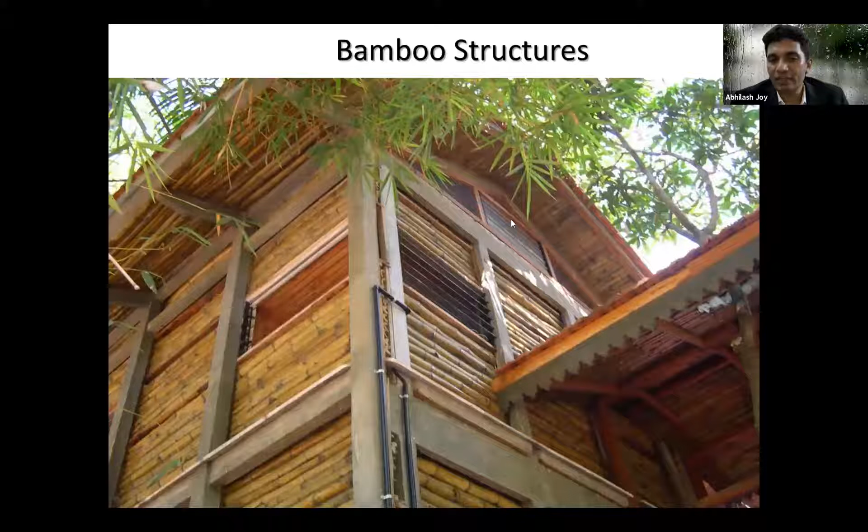It's not concrete. We use only sand and cement. It contains reinforcement, but the percentage of reinforcement is more. And we have the wall, the floor, and the roof panels in bamboo in combination with mortar. So it's a blend of three different systems: one is the RCC, one is the ferro cement, and the bamboo floors.

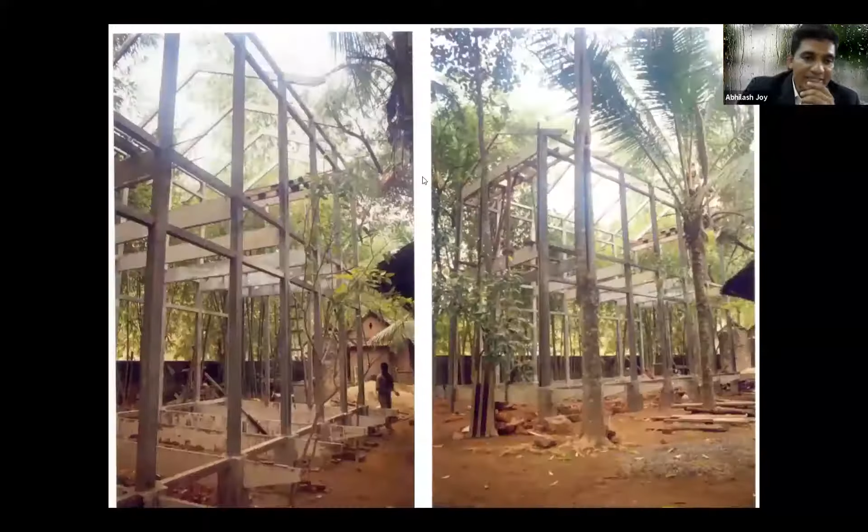So it's an office building which was built in 2002. It is occupied since 2003 and still working as an office building. It's a ground plus one building. So if you can see, the basic frame is like this. Since it's a waterlogged area, it was built on a pedestal. We had 60 centimeters height, which was never touching the ground.

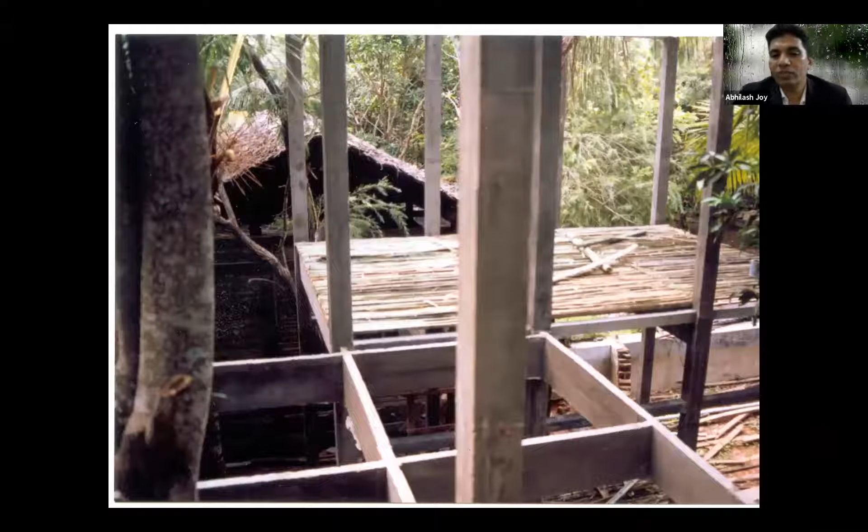And you see the ferro cement beams at the ground and the first floor level, and the roof beams, which again are ferro cement, and only the columns are in RCC, which was in situ, and all other members were precast. And the floor, roof, and the wall, if you see the systems here, every 1.2 meters we had frames to support the bamboo, so that the span of the bamboo was less.

We had done a lot of research on that during that time, because at that time the codes were not available, but we had done a lot of load tests. And the availability and the quality of bamboo was very important. It was very difficult to get good quality bamboo. And again, bamboo has a problem. All wood and natural fibers have a problem because they have sap, which contains glucose. So all the borers come to eat the glucose.

So any wood, either natural wood or bamboo, needs treatment. Our forefathers used to put the wood, or maybe the coconut leaf, inside water for a few weeks or months, so that all the sap oozes out of the wood or the leaf, and it can be used. Once the sap is gone, the borers will not attack much. Traditionally, that was the technology used, but for large quantities it's not viable to put wood or coconut leaves inside water. So we use pressurized artificial treatments.

We had copper, chrome, and arsenic, which is used for external treatment, and copper, chrome, borax. We have used the copper, chrome, arsenic method, which was available then, but now I think it is banned. So now we have only copper, chrome, and borax, which is used for pressure treatment for wood, so that the borers don't attack. If you come to see this structure, it is intact like this for the last 18 years. That's because of the treatment done.

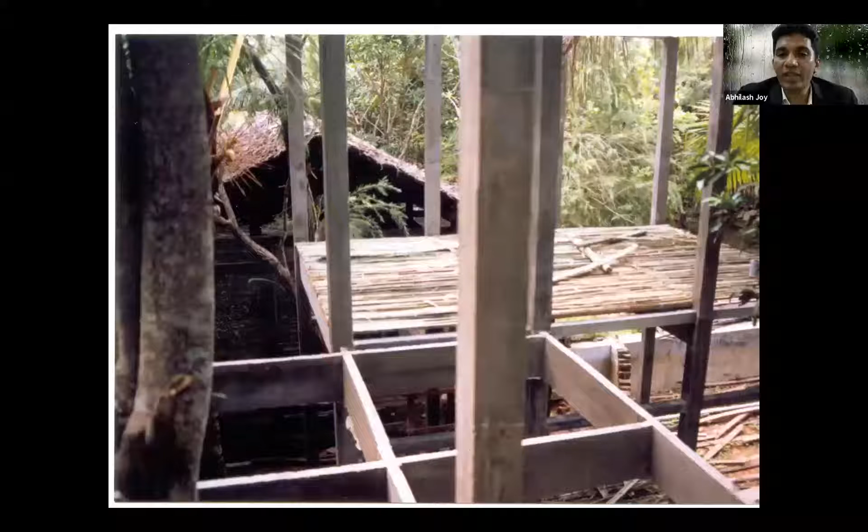So in any structure where we use wood, we have to treat it, and the moisture content has to be less. So we have to remove moisture. There are a lot of processes. Even for wood which is used for doors and windows, the water content needs to be less than 5%, so that it does not warp. So seasoning has to be done for any sort of wood structure, so that it does not expand and contract drastically.

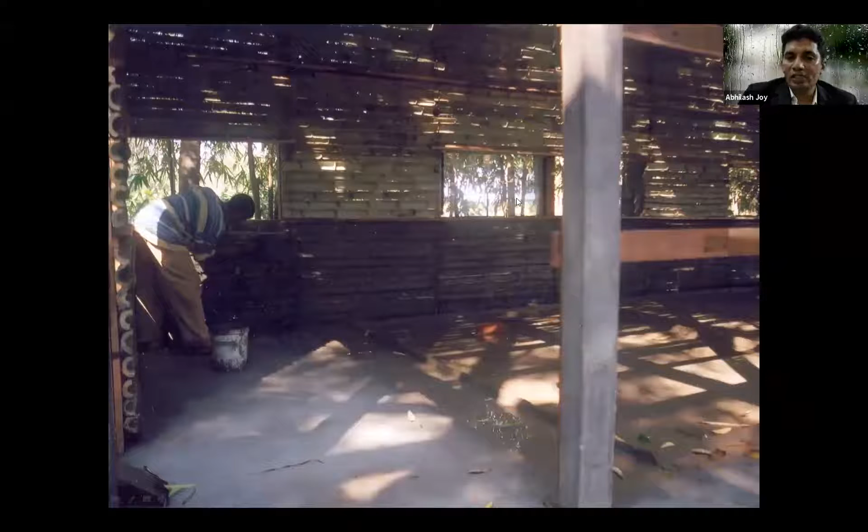And if you see the walls, again, there are so many minor details required for the connection between the columns and the walls. So panels like this. And if you see this office interior, this is the first floor of that building. You can see the bamboo on the roof. The wall from inside is just plastered, and the floor is almost the same. So it's an 18-year-old office which is still working. It's a talking testimonial.

And the main material which we have used there is ferrocement. In ferrocement, we don't use any large aggregates. We only use sand and reinforcement. And the reinforcement size, we usually don't go above 8 mm. Its design is like a shell. The main advantage of ferrocement is that it's decentralized. So if you have a remote location, we can use it and demonstrate its capability, and it has its own strength. But it doesn't meet the cover criterion because it's really thin.

It's maximum 1 inch to 1.5 inch thick. So there is an issue of cover criterion, but we use 1:1 or 1:2 mortar, so that the chlorides or sulfates from outside do not reach the reinforcement. So we have to be very careful, and the system needs to be done in a proper condition.

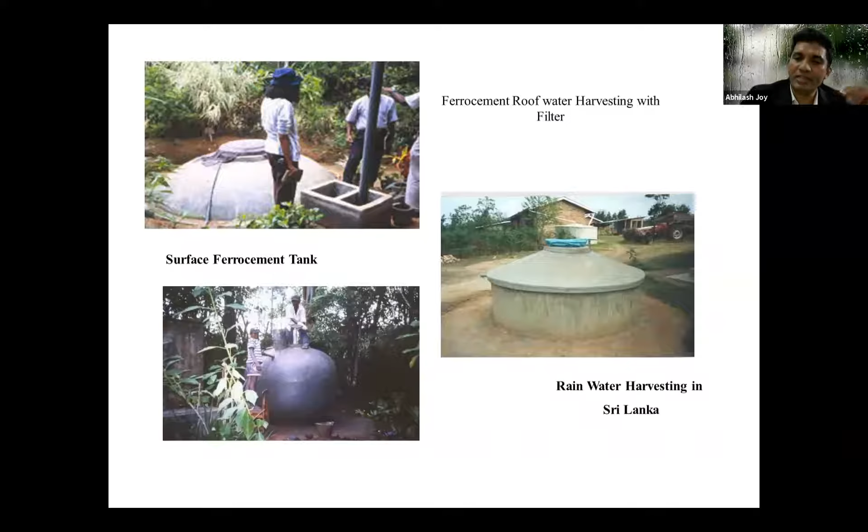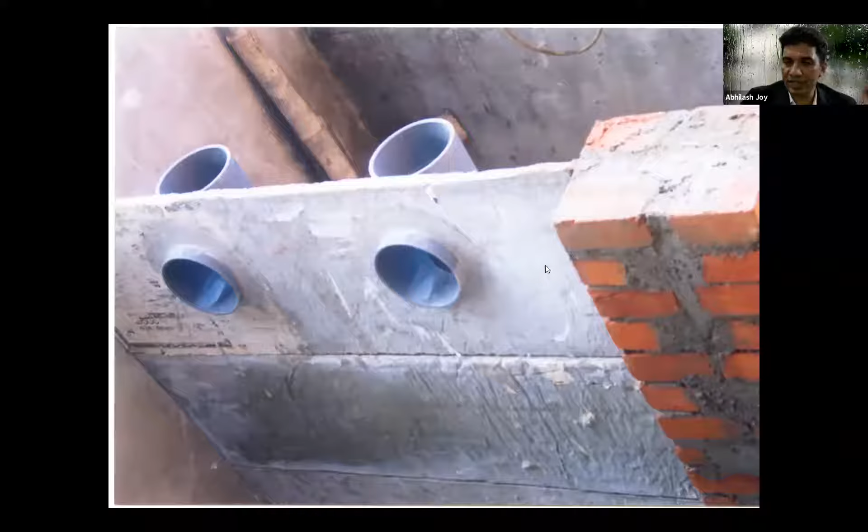And it can be used as water tanks for rainwater harvesting. It can be used for biogas plants. It can even be used as baffles inside the STP or septic tanks. So it has a wide range of applications, it's really light, and any trained mason can do it. So it's a decentralized technology. We can always try to use this. We have used it in a lot of different types of projects.

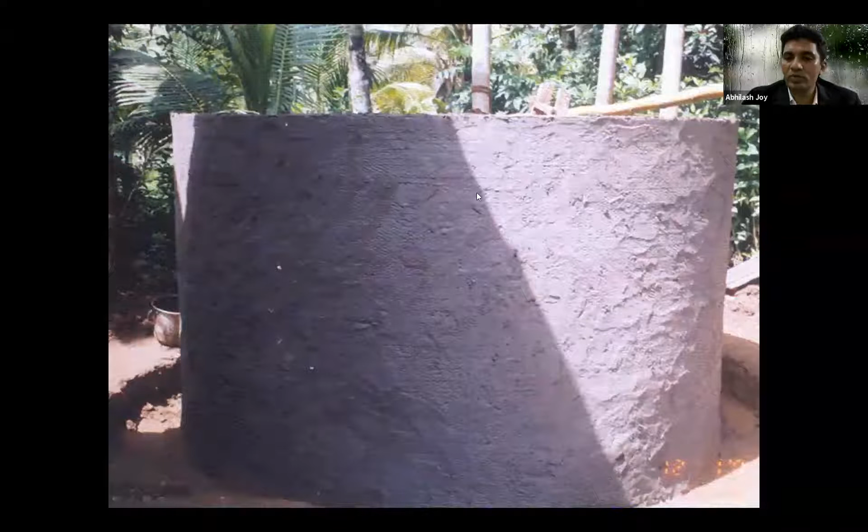Including, as you see, in buildings. And this is a surface tank which is made out of ferrocement. So we use weld mesh and chicken mesh for this, and a tank like this. The beauty of this tank is usually an RCC tank costs around 4 to 5 or 6 rupees per liter, but whereas this tank costs maybe less than 2 rupees.

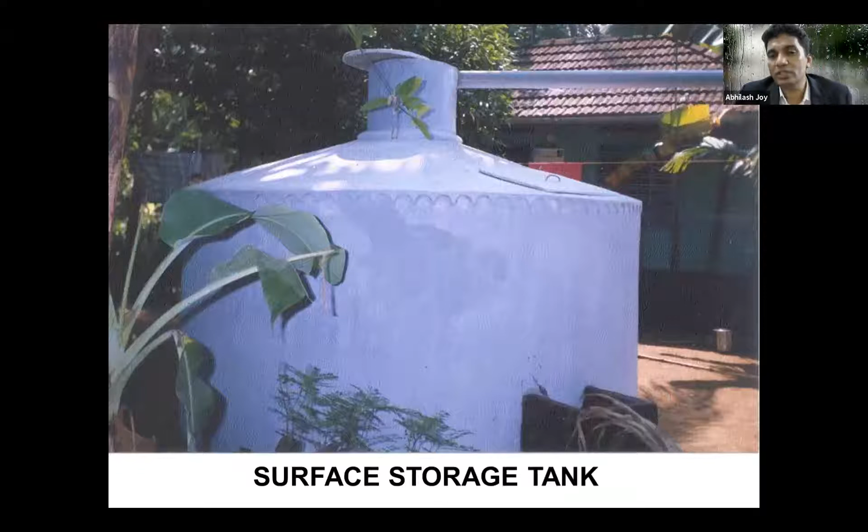If you use the soil strength, if the soil is really hard, we can use the strength of the soil, which maybe we have to dig like a well and line this thing, and the cost will come down further to less than 1 rupee. So the cost factor is really important. The life also is important, the cost also is important.

So this is a functional tank somewhere in Kuttanad region of Kerala. So there you have a flood prone area. So it's built on the ground, so that there is no water pressure and it does not come up. And this is the tank, ferrocement again, which, as I said earlier, is done below ground.

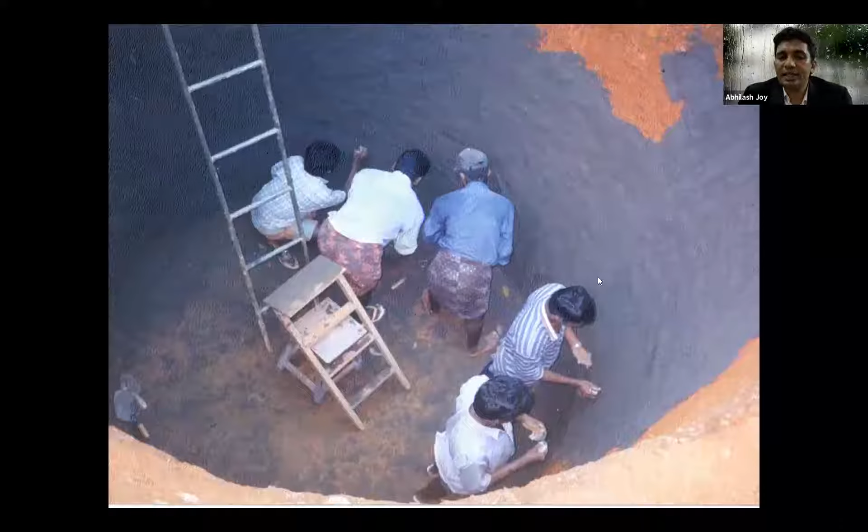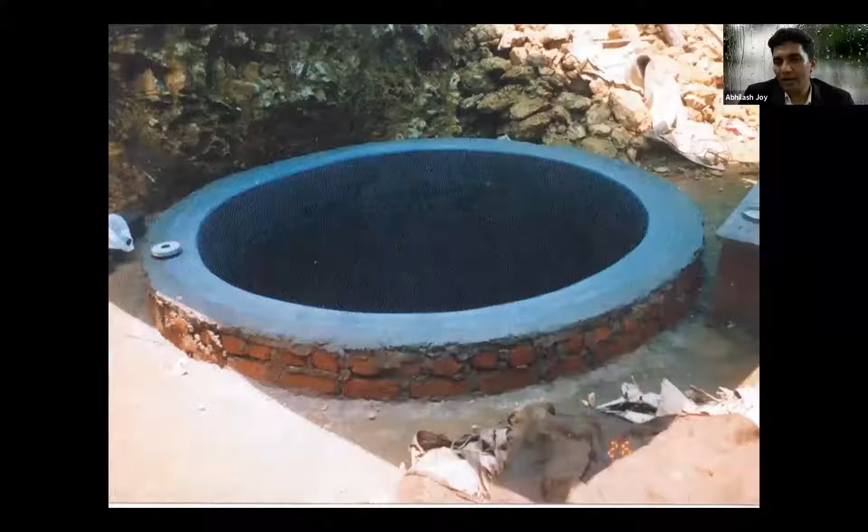So we make a hole like a well as per the volume required, and we plaster it first. Put chicken mesh, 2 layers, and then plaster it again and make a non-pervious layer. And that's it. We can use it as a tank. So we use the strength of the soil, and we can have a roof cover so that we can store water.

So as you all know, in Kerala we have around 3 meters of rain, that is 3,000 millimeters of rain every year. But still, in maybe January, February drought season, everywhere there is a crucial water crisis. So for every 5-member family, we should store the water required for our cooking and drinking needs. That's 5 liters per day maybe per person. So that's 25 liters per day, and for 4 months it's less than 10,000 liters.

So if you can build a tank like this, a 10,000 liter tank will cost maybe around 10 or 12,000 rupees, less than around 1 rupee per liter. So with a 12,000 investment, we can mitigate the water crisis.

If you have 1,000 square feet, that's 100 meters square of area, with 3 meters of rain we get around 3 lakh liters of water every year from 100 meters square. That is 1,000 square feet area of roof. So that is a large quantity, and what we require is only 10,000 for drinking and cooking needs, not all other needs. So I think we have abundant rain and water, and we should use this technology to store our own water. And you all should be ambassadors for doing that.

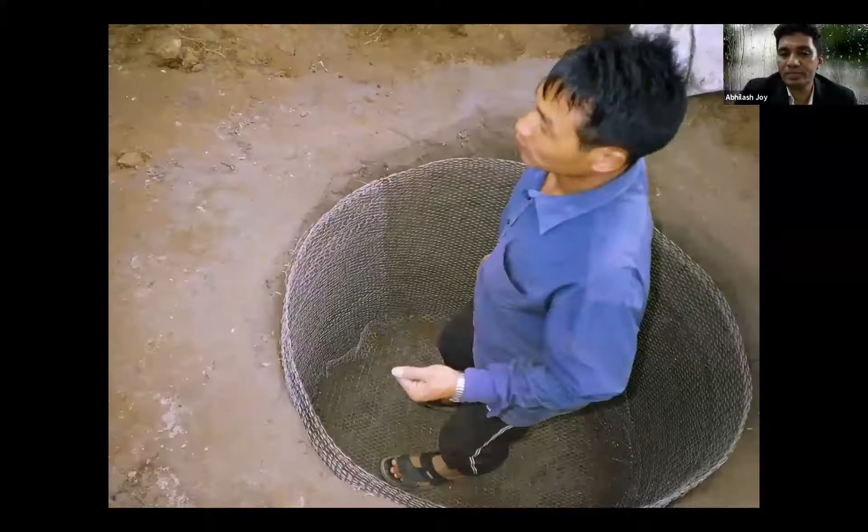So this is the beauty of ferrocement: it can be done really decentralized. These are all unskilled people who are doing this. They can easily do this. And even for frames, since the ferrocement works as a shell, you can use even bamboo sticks for creating the frame.

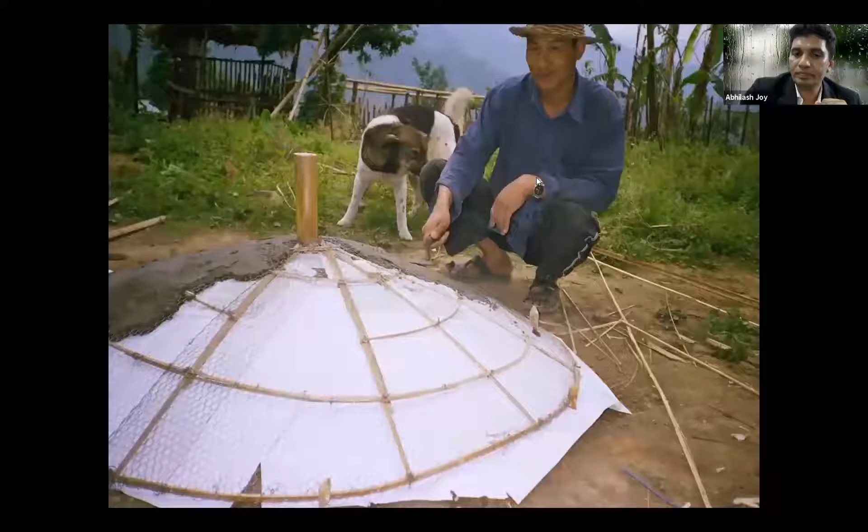For a small tank, because in Mizoram, Nagaland, all the northeast state people live on top of hills, because traditionally they had these tribes attacking each other. So they live on top of the hill, and the water source may be kilometers down, because what you see over there is not hills like here. It's sheer slope hills, and maybe it will be more than a kilometer to walk down to the nearest water source. So that was really important.

They attended a lot of trainings there and helped people store their water, because they have a lot of rain similar to us. Around the year they have rain. So that was really important.

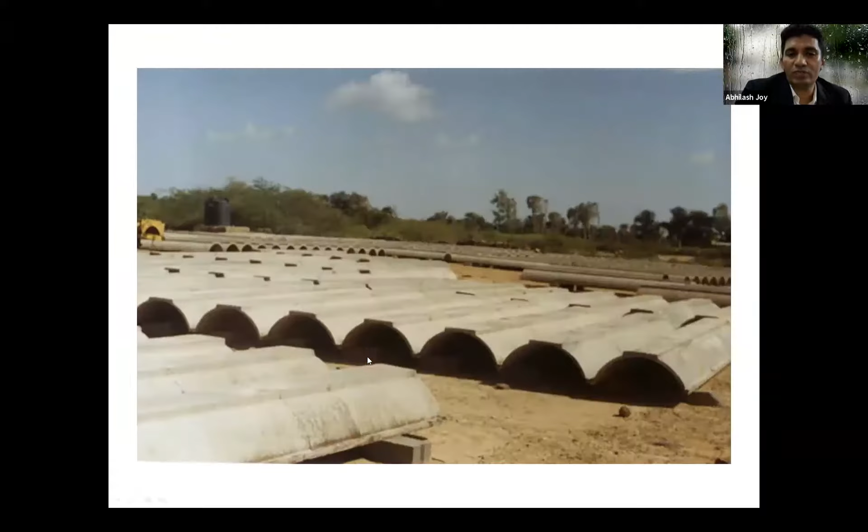So what happens here is that it was built on a buoy. It's floating, and the floating platform was sunk, and so that was the construction mechanism. So it's been there for the last 8 to 9 years. It's a working cottage. It's a resort in Kumbalangi, so it's still there.

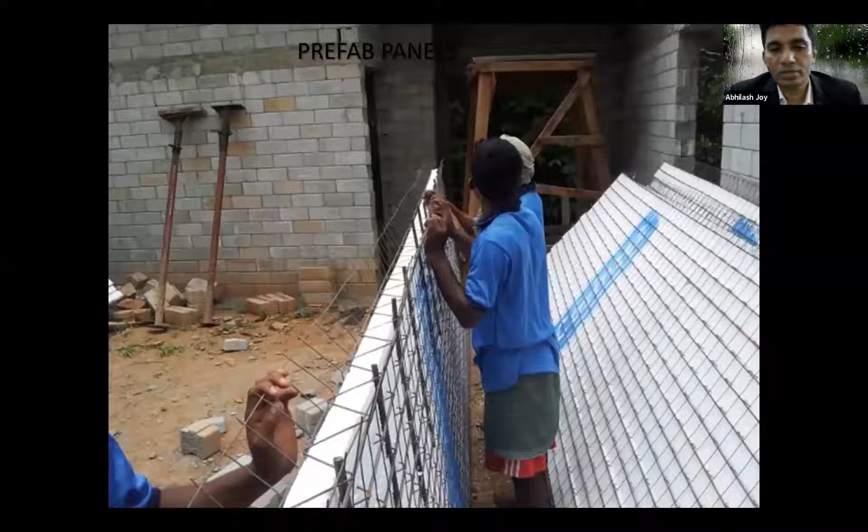This is another sort of panel which we use. This is a polystyrene panel. We call it thermocol. There is a company called Worldos, which is a Brazilian company. They make this panel. It's a factory-made panel. If you can see near their hand, you can see small truss-like structures inside this panel, which is factory-made. Inside the polystyrene, there is a truss at every 6 centimeters.

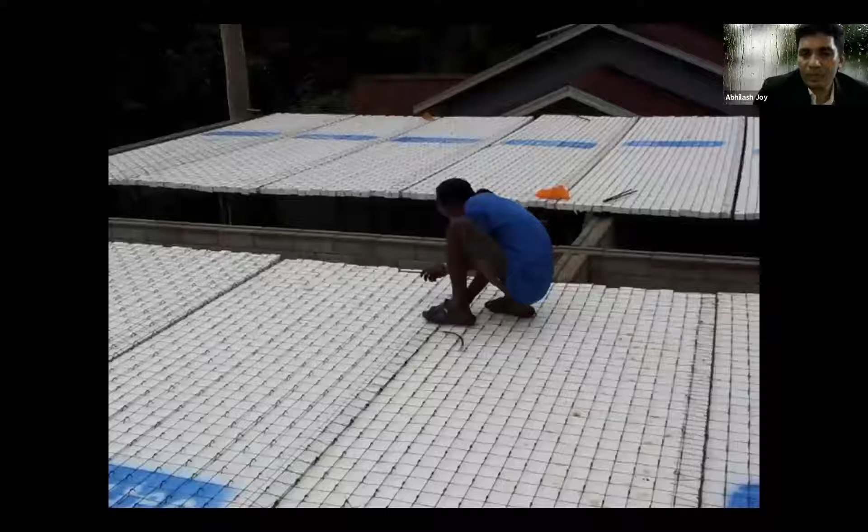So instead of using a single bar, they have used a small truss, and the capacity of the truss is very high; they have used up to 6 mm bars, 4 and 6 mm bars. So it acts like a truss inside. You can see this laying. It's usually used as a floor. They also use it as a wall structure. It can be easily carried by a person.

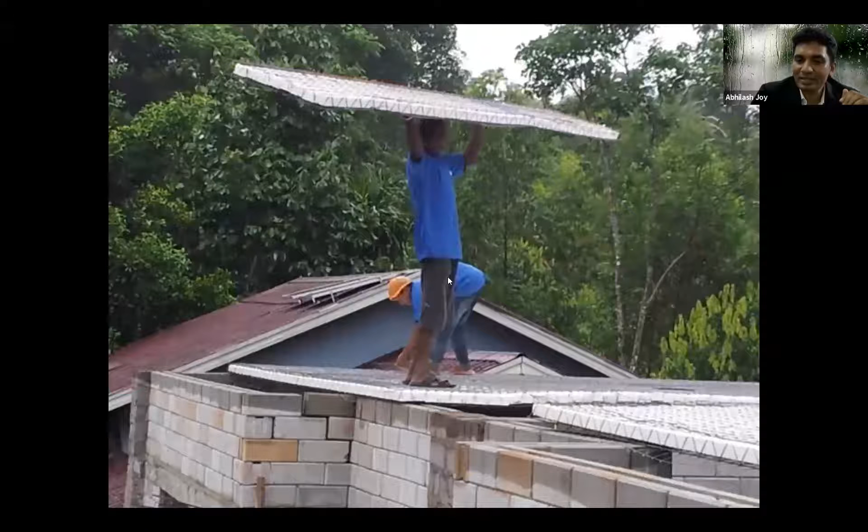So it's very light. You can see that it's almost self-supporting, but I'll show you how it can be placed, because you don't need a large shuttering mechanism. So for a 1,000 square feet house, the person has to come with this material in the morning. They can shutter in the morning itself, lay a 5 centimeter screed on top. You can see the minimal number of, and there's a connection detail between the panels to lap it. And you place just a 5 centimeter screed on top of it.

So we have done rooms up to 5 meters of span, and it's much more rigid than a usual 5 meter span. This thickness comes only up to 12 centimeters, including the panel and the screed. So usually for a 5 meter span, we need at least 17 to 18 centimeter thickness of slab. And still there might be vibration. For this type of structure for 5 meters span, I have noticed it's just like a hard floor.

So this is an alternative technology we can use. And by using this, you can do the construction in no time. It's very fast. Since the truss material is the supporting system, you don't need any great curing, so you can move on with the construction. So there's a time advantage by using this.

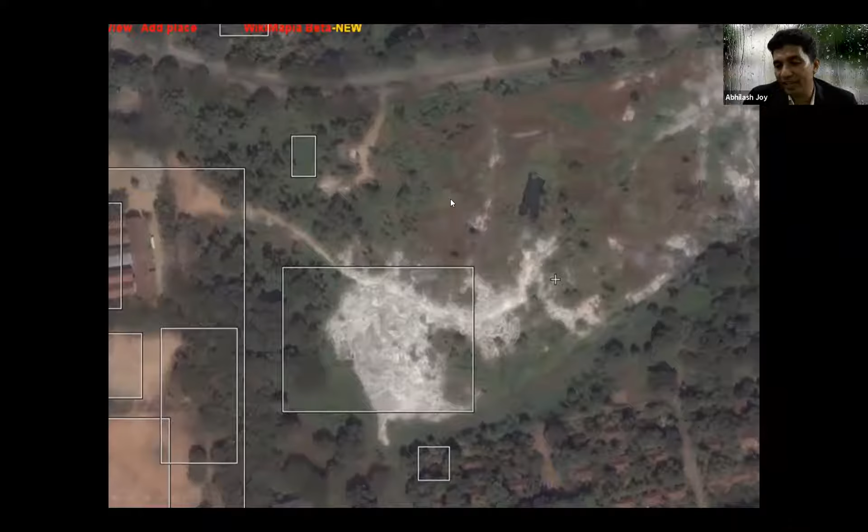This is an aerial photograph which is taken near Cochin. This is Udyogamandal, the FACT gypsum dump. Actually, it's a big mountain near Ambalamugal. So what happens here is that there is a product from rock phosphate, which is produced by FACT. So this is a byproduct. The main mineral comes from Africa and other parts of the world, and the byproduct is gypsum.

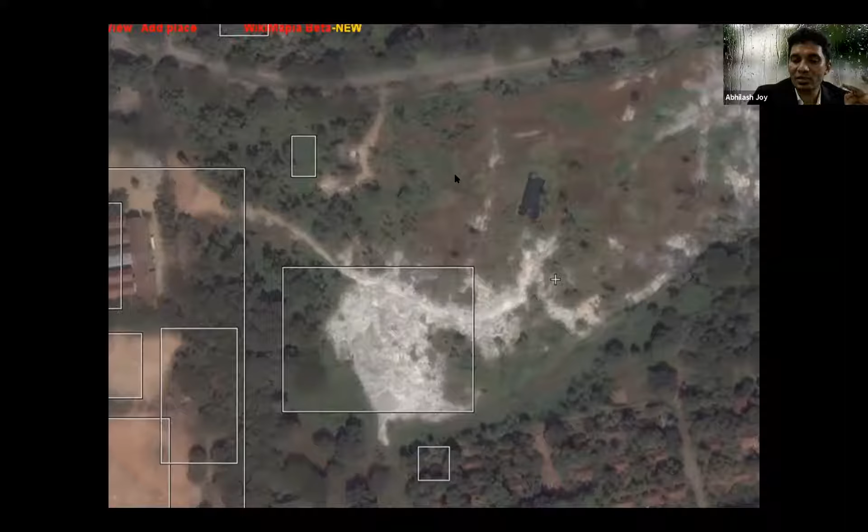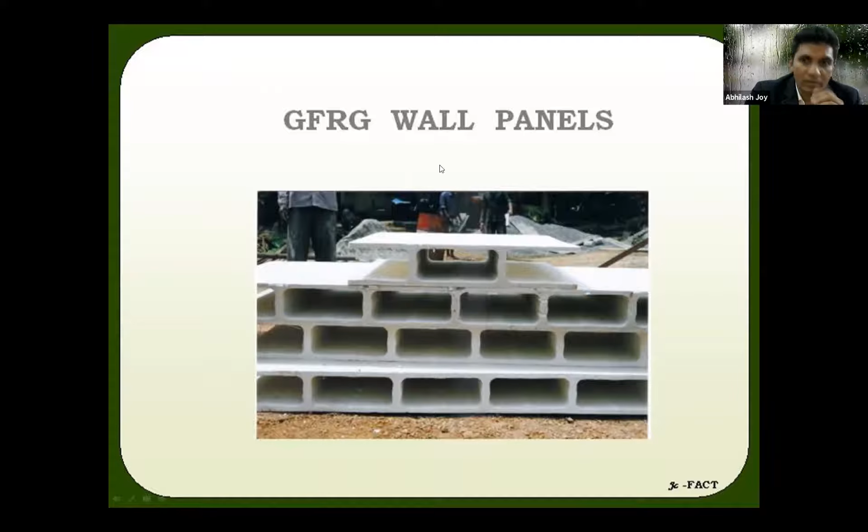And it was lying there for the last 30, 40 years, and now they are collaborating with an agency in Australia, and they are making these GFRG, glass fiber reinforced gypsum wall panels. These are very good and very fast for construction of houses. So we have these panels like this.

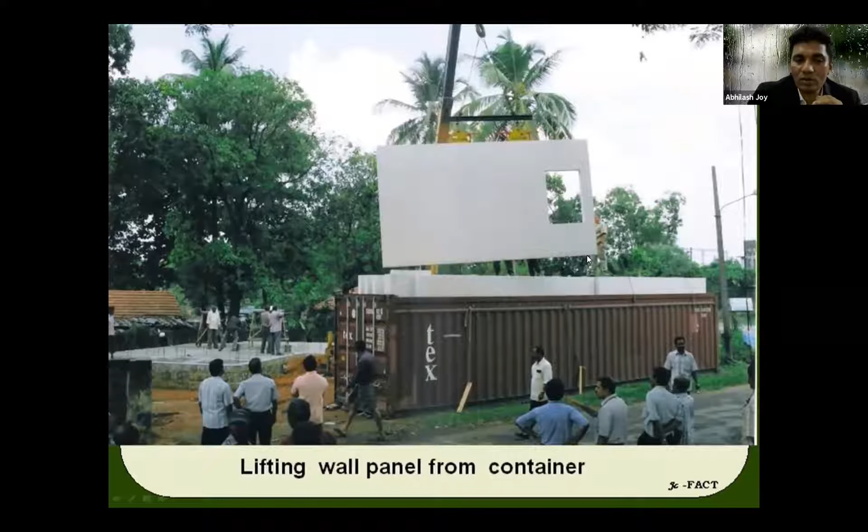I was involved in the construction of that house. There is a sample which is near Eloor. I think it is almost 15 years old, so it's still there. They use it as some sort of office. So the construction is, you have a foundation just like a normal house. You have reinforcement propping up, and you keep the panels as walls.

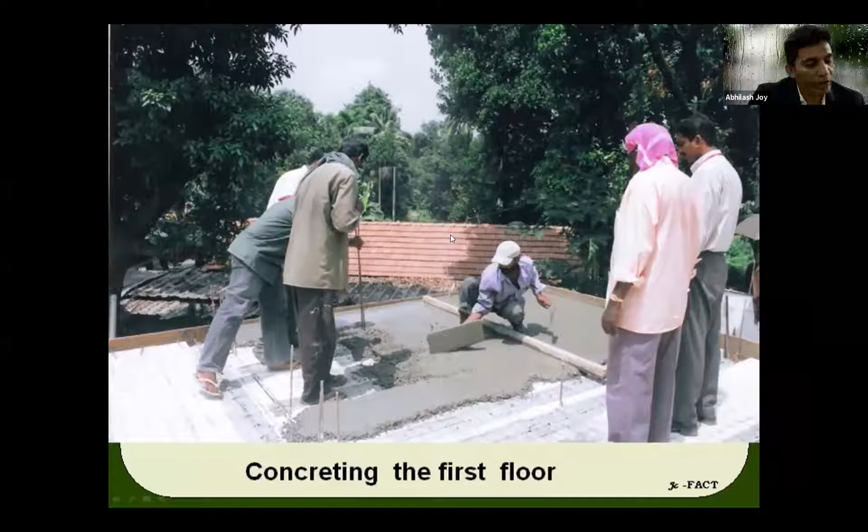The doors and the windows have to be pre-planned. And in a single day, you can place all the walls. Then comes the roof. So in a week's time, you can complete the walls and the roof of the structure. The disadvantage is that at the joints of the panels, you need to have some waterproofing done. So again, on the first floor, the panels are placed. So almost in a week's time, the structure is finished.

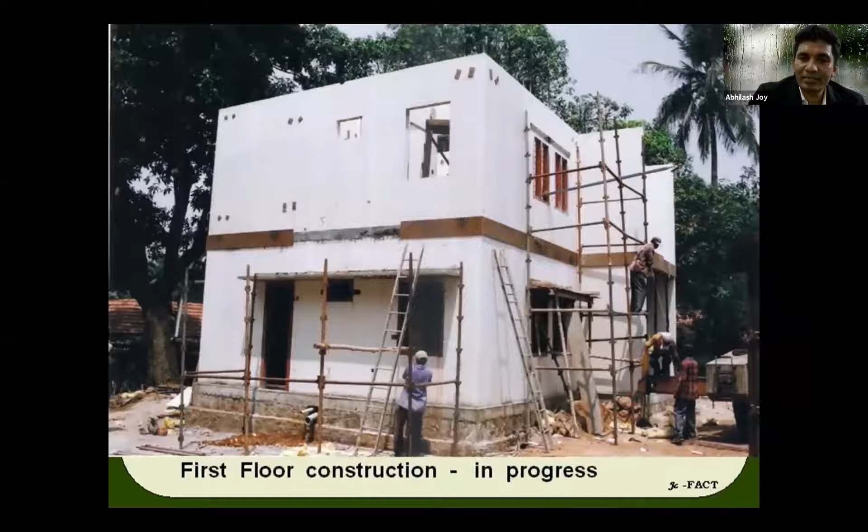And since we have a large amount of rain, they have covered it with a Kerala style roof, so that the panels are not exposed to direct rainfall.

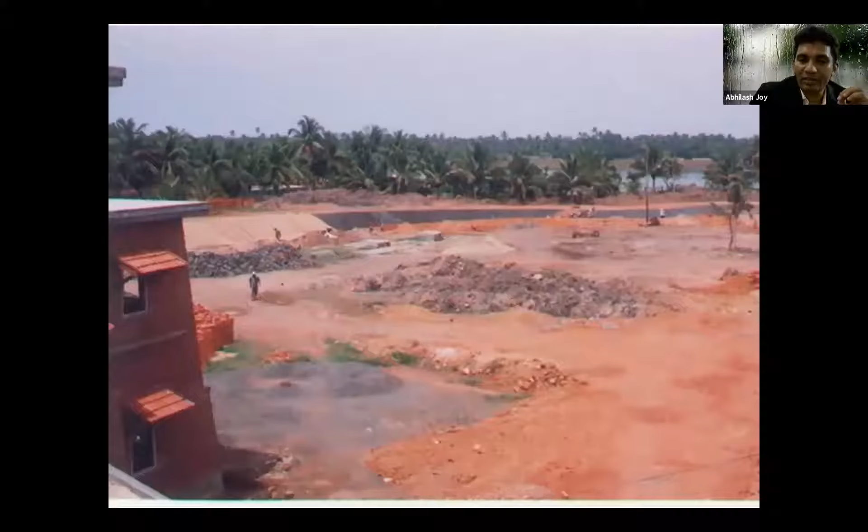Next, I would like to show a demonstration of rainwater harvesting, which is done using clay as a construction material. So as I've told you earlier, we have around 3 meters of rain, and most of the rainwater flows to the sea. And we don't use the water as such.

So this is a hotel in Ernakulam, Sarovaram Hotel. I think they have a very large tank. They store around 22 lakh liters of water there, and they use the roof as well as the ground.

So the surface groundwater also comes to this pond. If you see this, they have used the clay available there as the lining instead of any concrete. As you all know, clay allows water, but the permeability is very low. So clay is used as the lining material.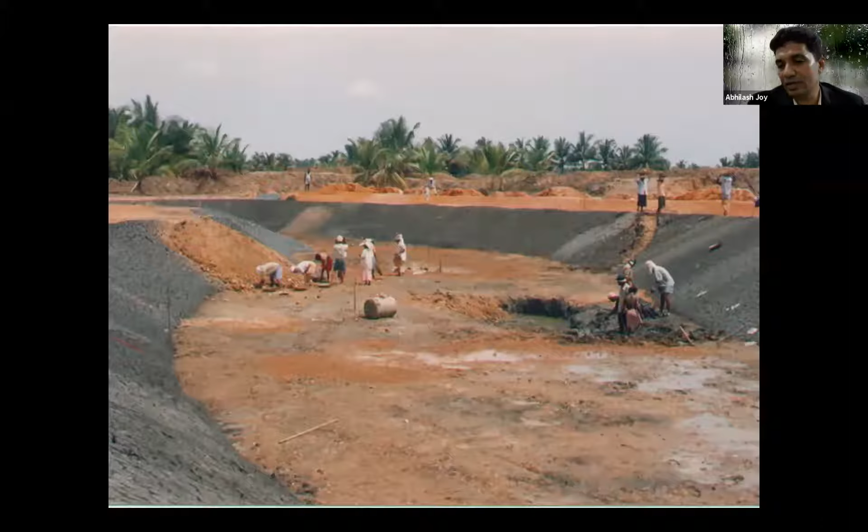If you have seen in paddy fields, once clay is dry, it cracks. So to keep it from drying, we have used jute geotextiles on top of it, so the clay does not lose water content and it remains intact. On top of it, we have used lining with granite stones. Since the area of land is very large, this pond gets filled up even before June 15.

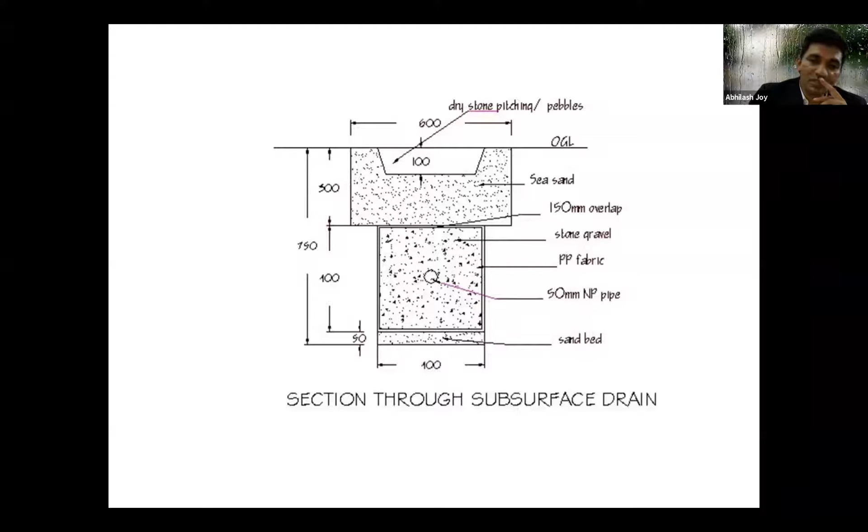And I was talking about the subsurface drains. We have used a subsurface drain, so all water falling on the ground comes through it. This white fabric is polypropylene fabric. This was built around the year 2000.

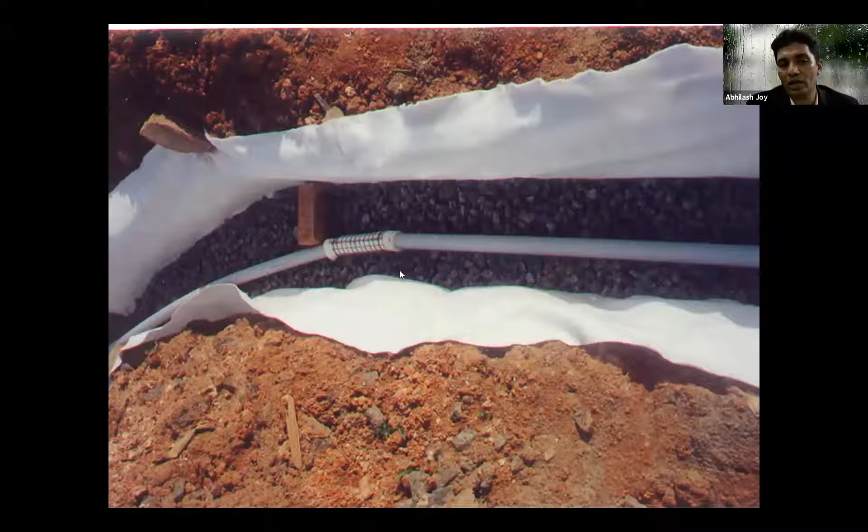We have this perforated pipe, and the beauty of this subsurface drain is it doesn't allow any particles to come in, so it comes in as filtered water. Even light turbidity will be cleared. By the first or second week of June, this pond gets filled up, and the entire drinking water requirement is met from this pond.

And the interesting thing is that as this property is right on the coast, and they have clay soil, they had no access to groundwater or the municipal water supply. They used to get only 22,000 liters per day, which was not at all sufficient for their daily needs.

The initial cost of construction was less than 10 paise per liter, because it used the clay from the site itself, and they got back the cost in 2 to 3 years. Otherwise they would have had to buy water from tanker lorries.

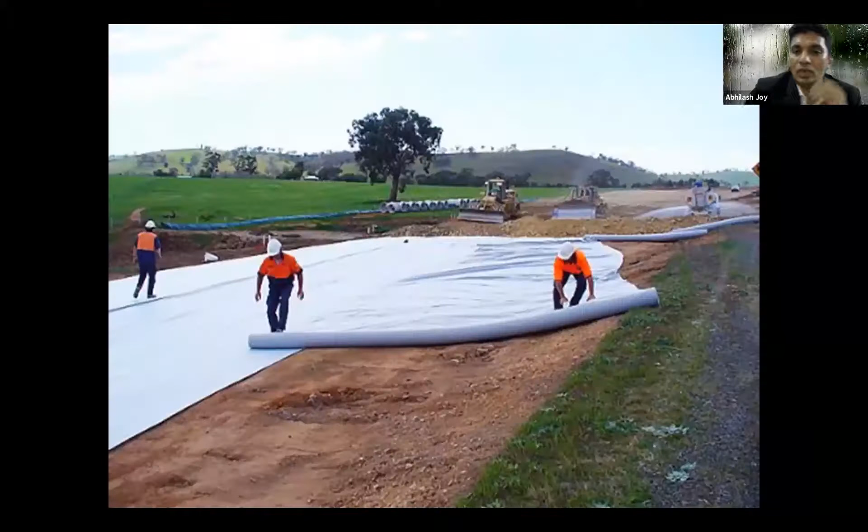Again, this fabric is used as a drain for grounds and roads. What happens to all our roads during the rainy season? They get bad. Good roads with proper subbase and base allow water to come up but not the clay. In usual roads, if the subbase and base are not good, under heavy traffic clay from the bottom comes up, lubricates the bitumen and aggregates, and potholes are created.

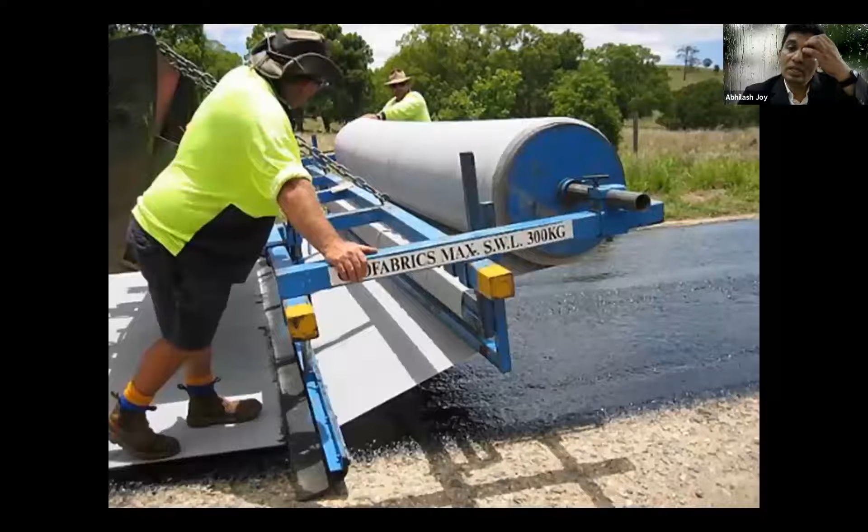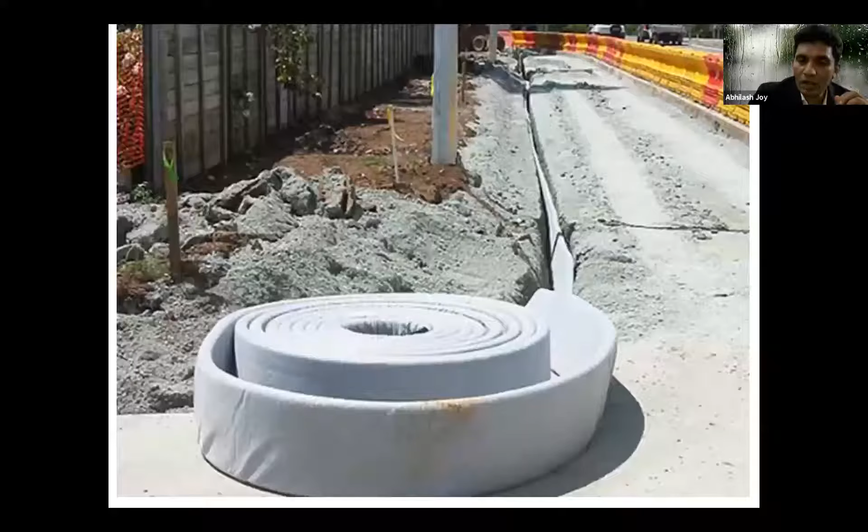If you have a membrane like this, it takes water directly from below the road and keeps the road intact. This fabric is used in developed countries under bitumen surfacing as a reinforcement layer. And it acts as a drain by the side of the road, so water from outside is not allowed into the road, protecting it. And railway lines, you can see.

This is the same material used as a band drain. In clay regions, it is very difficult to construct because there will be settlement. So band drains are used for reinforcing the soil. They take away water from the clay below, and the surface is preloaded.

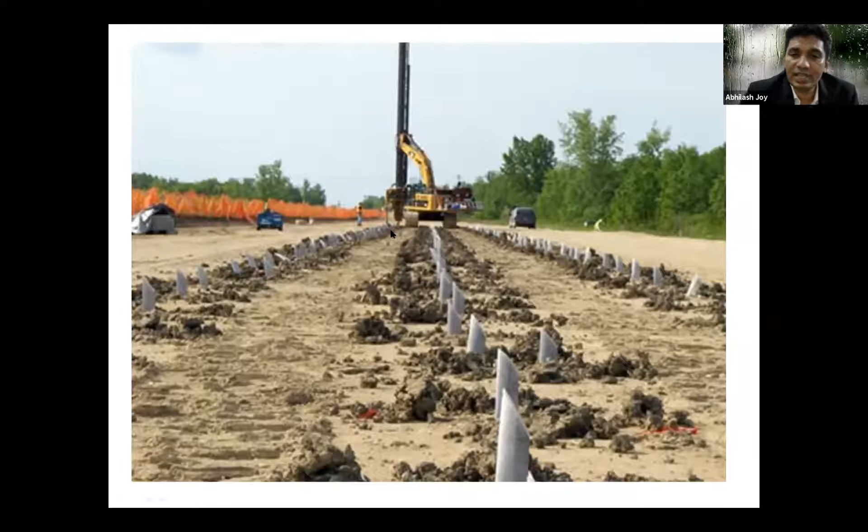I think at Vallarpadam, the project going on at the shipyard uses a similar technology; they preload the surface and allow the clay to settle fast. They use mechanization like this to insert the drain below the soil, and on the surface they provide a polypropylene fabric, and you can see the preloading. Once preloading is done, settlement is accelerated. Otherwise, the surface will always sink.

You can see locations where we have very poor alluvial soil. The settlement is very large. Any building constructed on it, even on piles, will have settlement because the soil settles and drags the pile down. This is a serious problem in many parts of Cochin and Kerala, and it can be solved using this band drain. It again uses polypropylene and can be used for construction of grounds, etc.

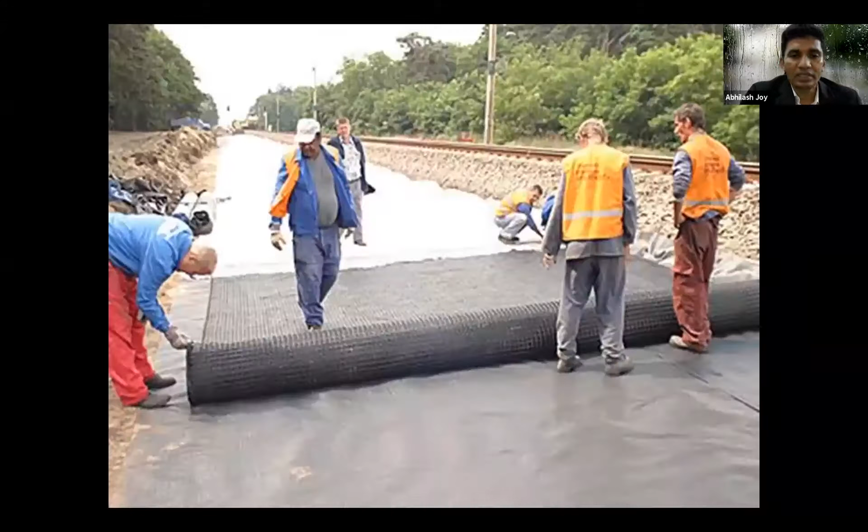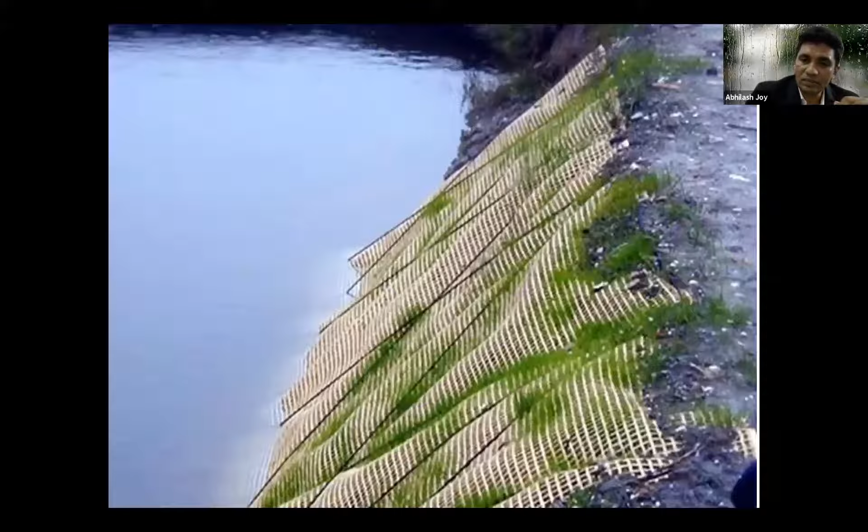Geotextiles, maybe coir geotextiles, used to stabilize slopes. So these are done in locations where the slopes are very large.

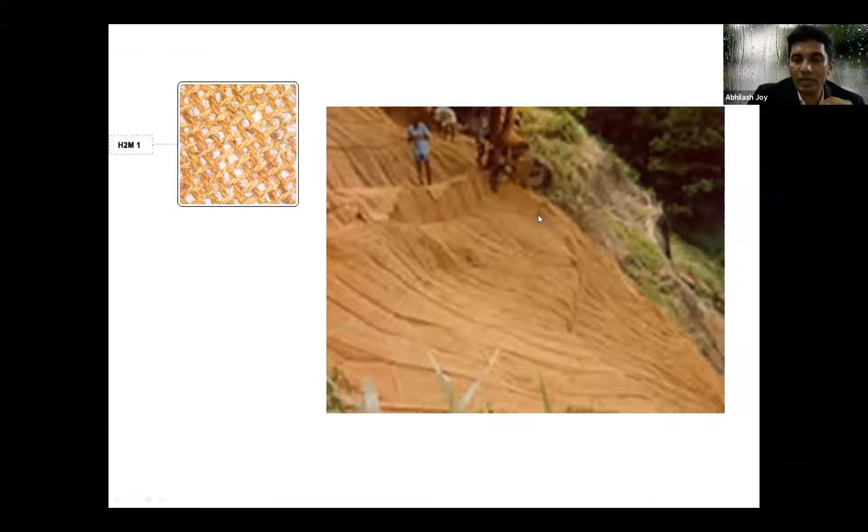Now I'd like to go to a project where we have done rainwater harvesting using plastic. So we have right now seen materials other than concrete like bamboo. We have seen ferrocement. We have seen clay. Now we are going to see plastic. So plastic as a material has issues like stability against UV. So when we use plastic, we have to be very careful that it is not directly in contact with sunlight.

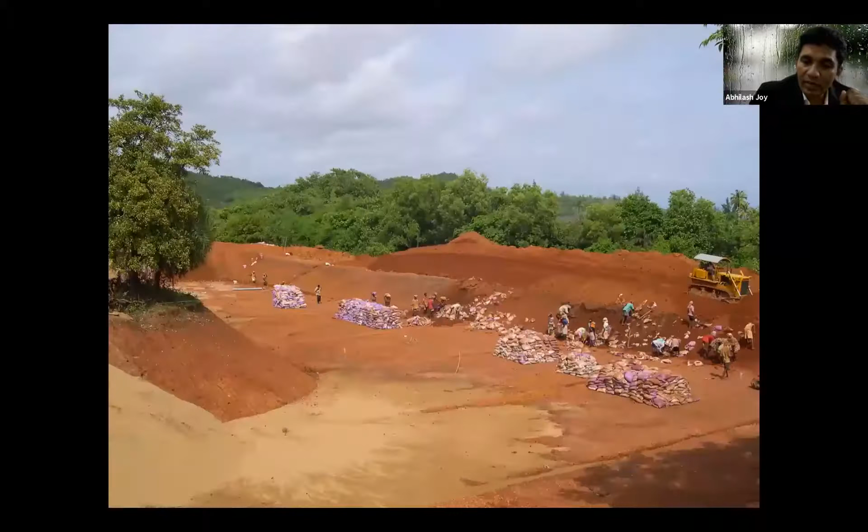So this is again a larger rainwater harvesting system. It is more than 125 lakh liters storage. It is done in a place called Gokarna. You know Gokarna.

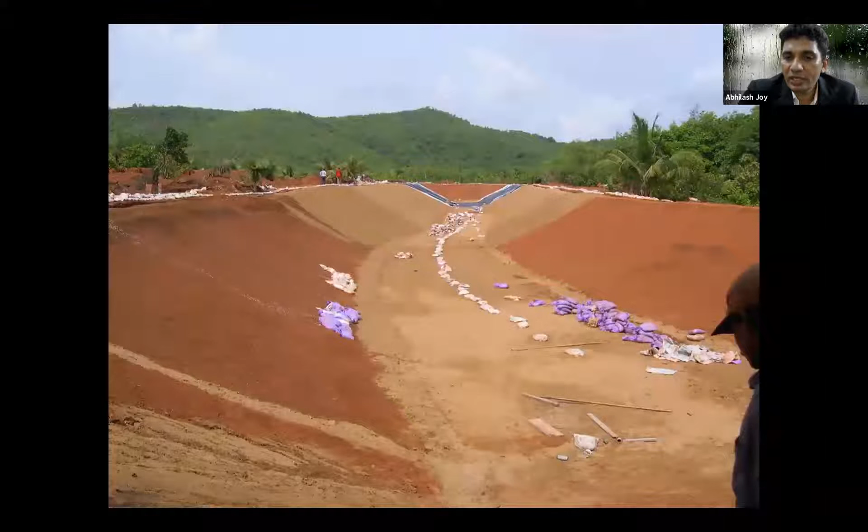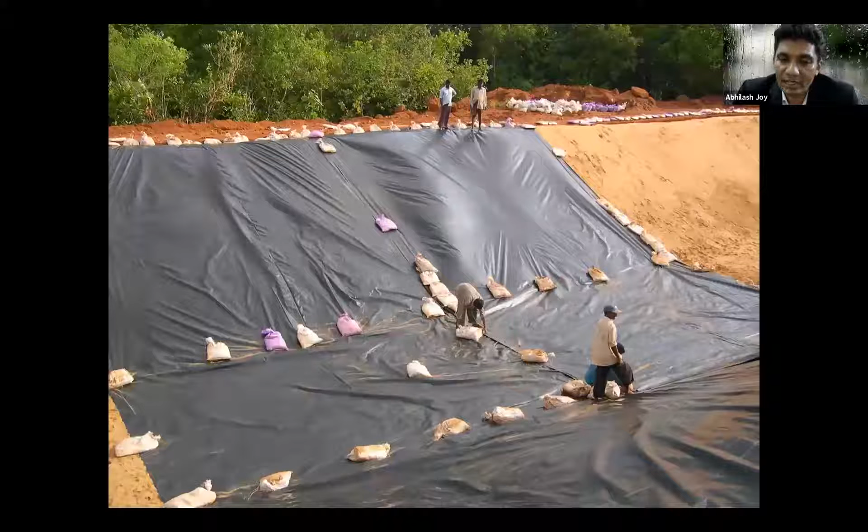This is built for a resort there in Gokarna. So the soil was hard. If you see this, we have generated sufficient slope, and we have used plastic as a lining material. Earlier it was clay, here it is plastic. So we have used HDPE and LDPE sheets of various thicknesses, and we have heat sealed the joints, just like we heat seal the plastic covers. So heat sealing was done to make a seamless surface.

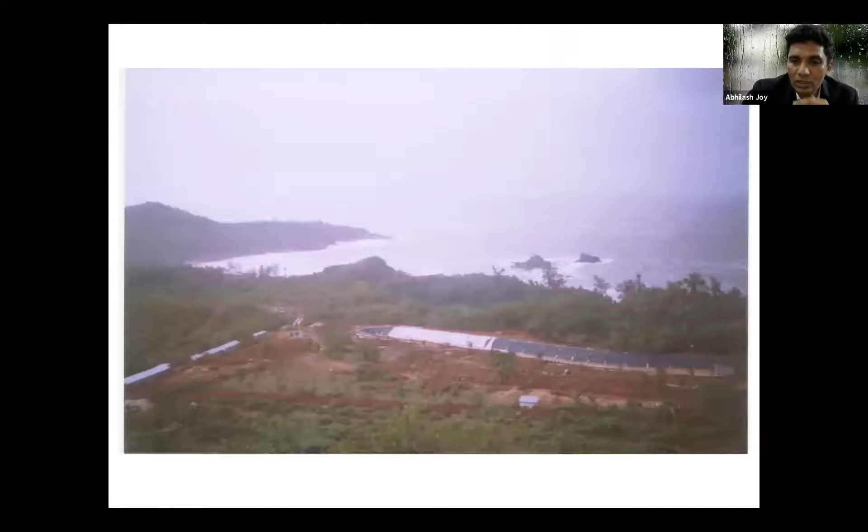You can see during construction there was rain, so it was against rains and wind. So we used sandbags on the plastic so that it does not fly off. So you can see it is a large pond. During construction, rain came. Fortunately, we pumped the water out, and there were local stones, laterite stones. Gokarna had a lot of laterite stones, so we used the local stones to pitch it. We can see this again, laterite used.

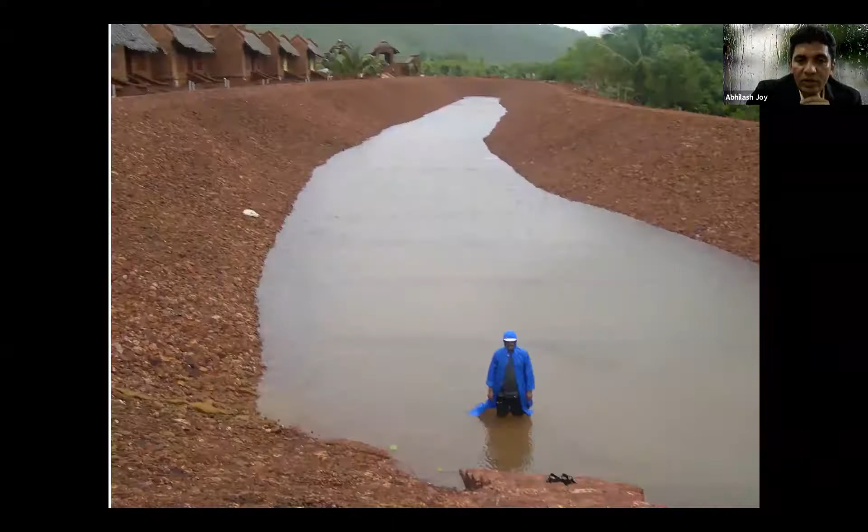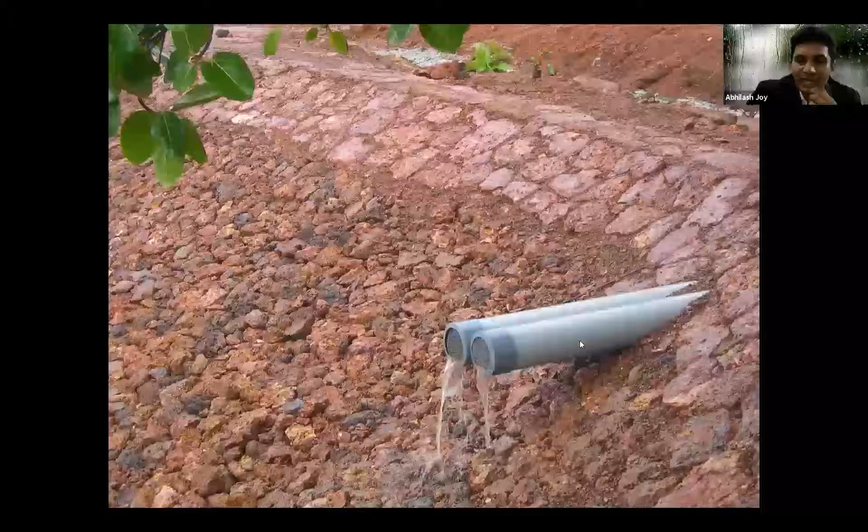So for a good engineer, any material should be a construction material. So we have used plastic. We have now used laterite lining, ordinary stones, which are available locally. So you can see again the water coming from the subsurface drains. The subsurface drains look like this at the top. It's a normal usable space, but the water comes like this through the pipe to the reservoir.

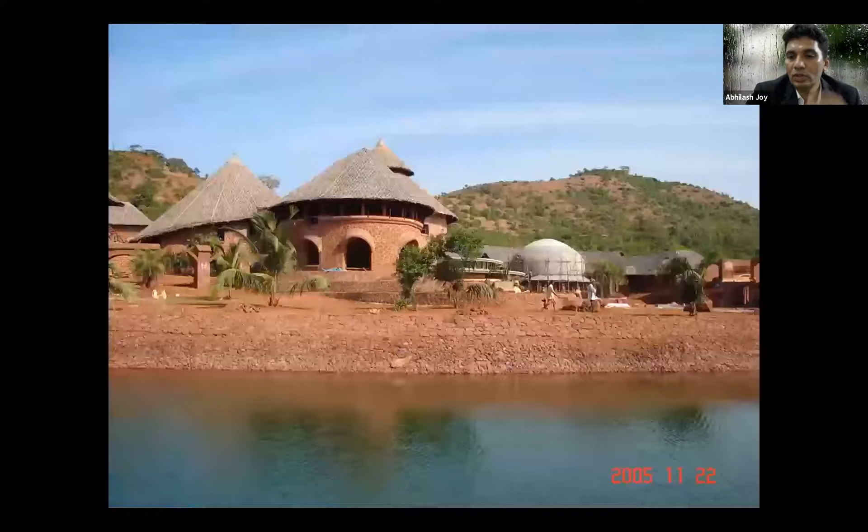So again, they have more rain in Karnataka, in this Gokarna region. If we have 3 meters of rain, they have 4 meters of rain, but that comes in around 4 months: June, July, August, and September. So they have larger rains, but since the in-between rain is less, they needed a much larger reservoir. So you can see the reservoir full, the large reservoir after construction. You can see the sea and the rocky surface; they didn't have any groundwater there. So rainwater harvesting was the only solution.

And different structures and shapes have a very interesting part to play, because shapes can reduce the quantity of material, and the structural system is stable when we use different shapes. This is a catenary vault and dome; the dome is around 10 meters of span, and the catenary is around 8 meters of width. It's an opening gate to the same.

This is again cement boards which are used. This is in Kerala itself. What we have done is we have used the cement boards as construction material: we purchased the cement boards, put spacers in between, and filled concrete into this. So the construction of the building was really fast, and the quality of finish was really good. We can, of course, fill lightweight concrete or even concrete with more fly ash. More than the strength of the material, this provides a shuttering and good quality construction.

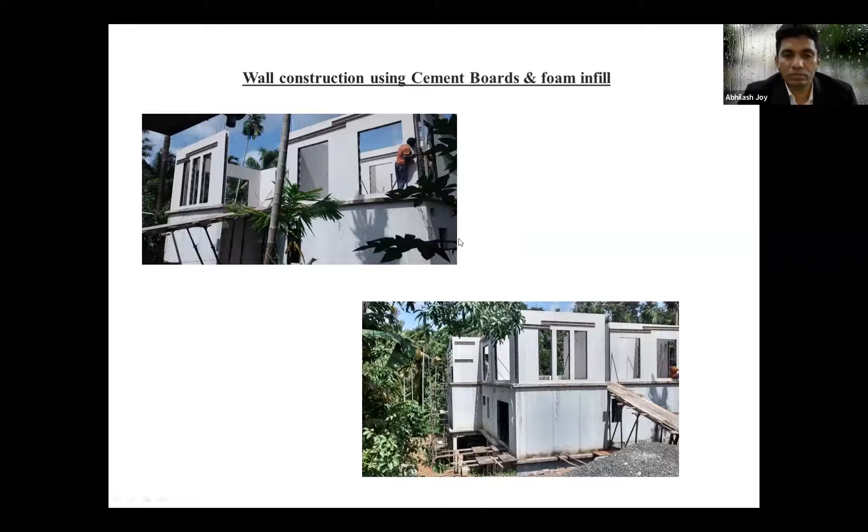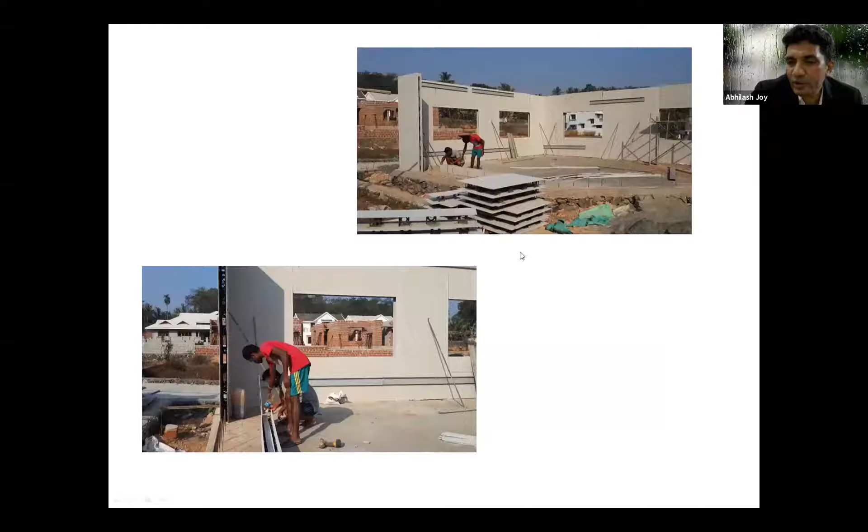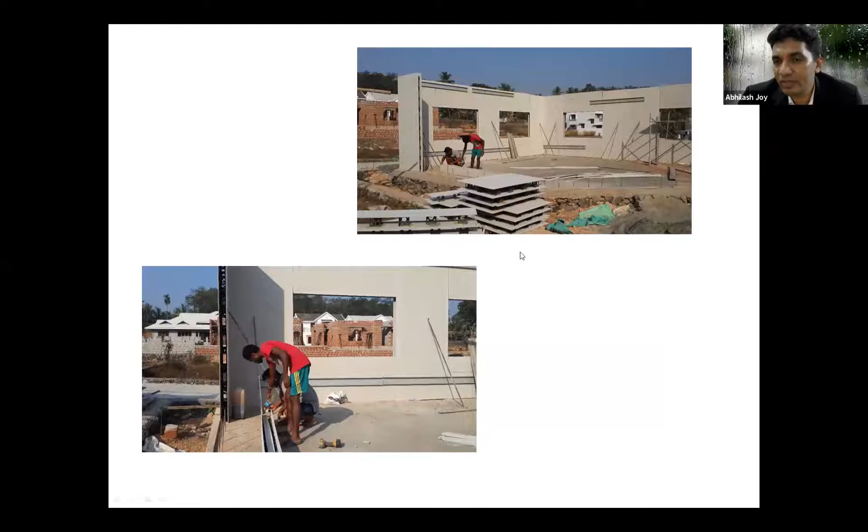So we can see these panels. You can see the spaces between the panels, and we fill concrete in stages so that it does not come off. So we usually do a 50 centimeter height all round first, then again 50, and we complete 3 meters of height in 5 to 6 days.

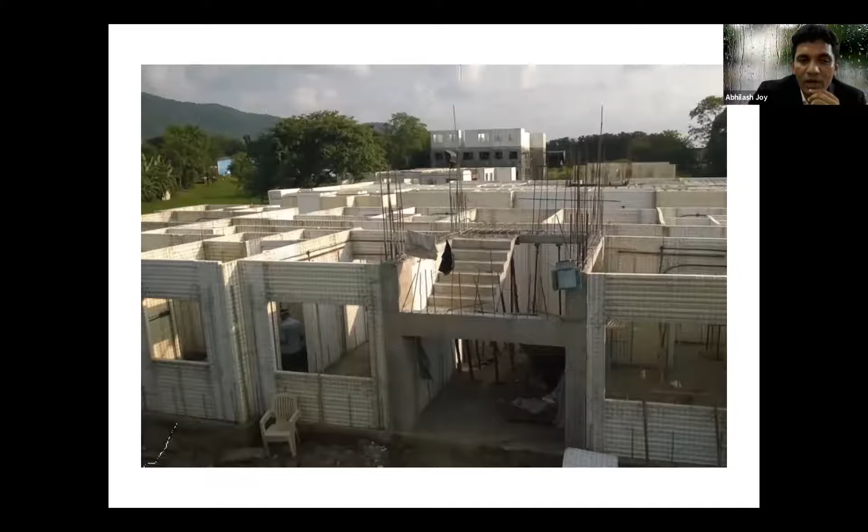Concrete wall, which is not a technology very popular here. So here the walls will have reinforcement. It's usually more used in the West, but we have a few projects in India which are done like this. So it forms a part of the structure inside the frame itself. For very high-speed, fast construction, we can use that.

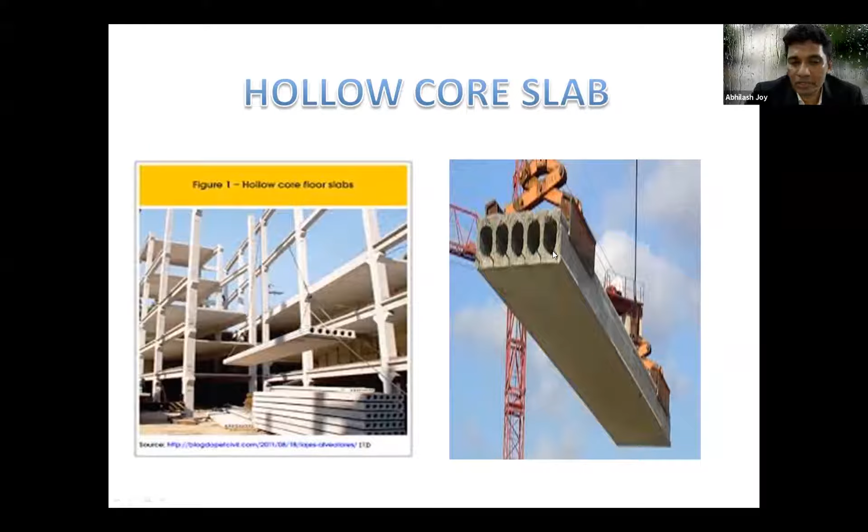And we can also use hollow core, which is precast slab panels. This is mostly used in prefab construction mode. We have a few projects, but it has not taken off since the labor cost here is much cheaper. It was limited to a technology demonstration.

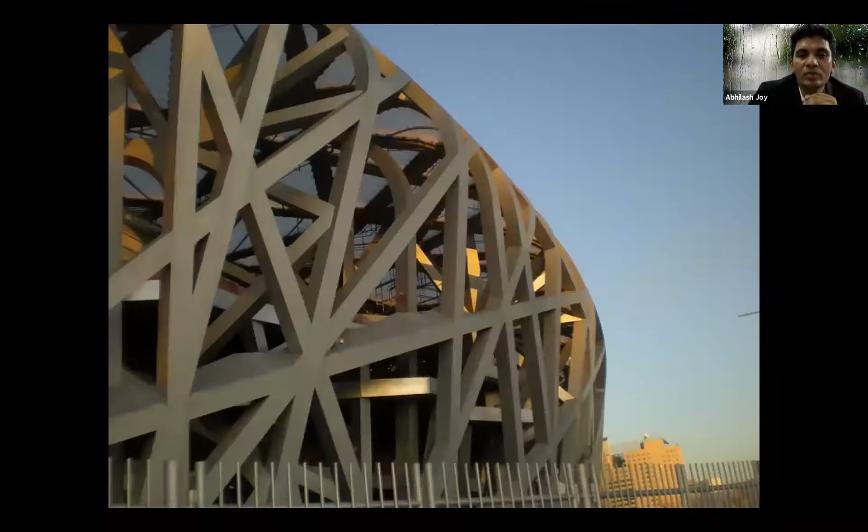This is the Nest, which is in Beijing—again a steel structure, which I thought would be an iconic structure to show you. If you see this, it's all frames interlinked like a nest. This is the basic structural system of this Nest structure. A single column is around 1 to 1.5 meters.

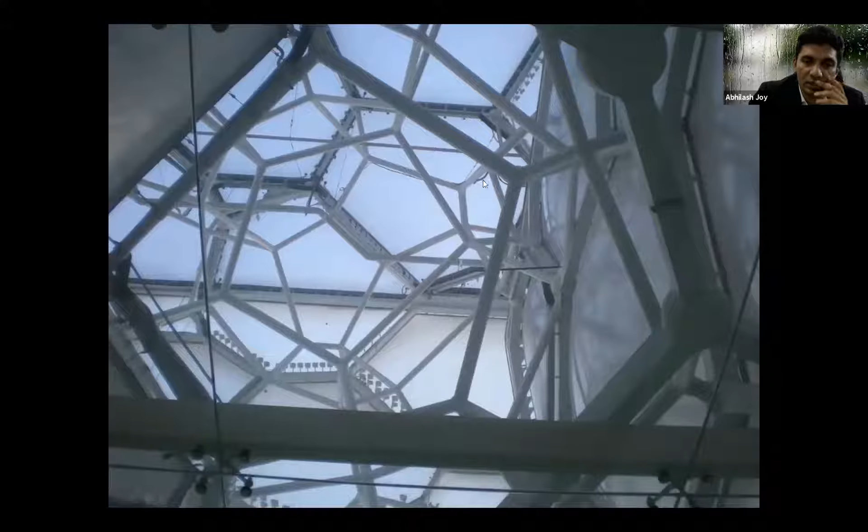This is the swimming pool structure, the Cube, which uses plastic as the outer and inner shell, with frames inside. You can see this outer and inner shell, and the frames inside. So any material, as I say, can be used for construction of any type of structure. We have seen plastics, clay, ferro cement, and now plastic again as a different construction material.

I would like to now go into a certain part of value engineering, which is really required when we use alternatives, because to achieve value engineering, we need to use these alternative technologies.

As you all know, for a building, when we conceive the project, there will be a conceptual design, then a detailed design. Then we analyze the building, then documentation is done. We then go to fabrication and construction. Construction logistics is there. Then there's operation and maintenance. And there is a certain life of the building which we need to work on. In between, we do renovation if required, or after the effective use of the building is over, it's demolished. So this is the life cycle of any building, just like a human being.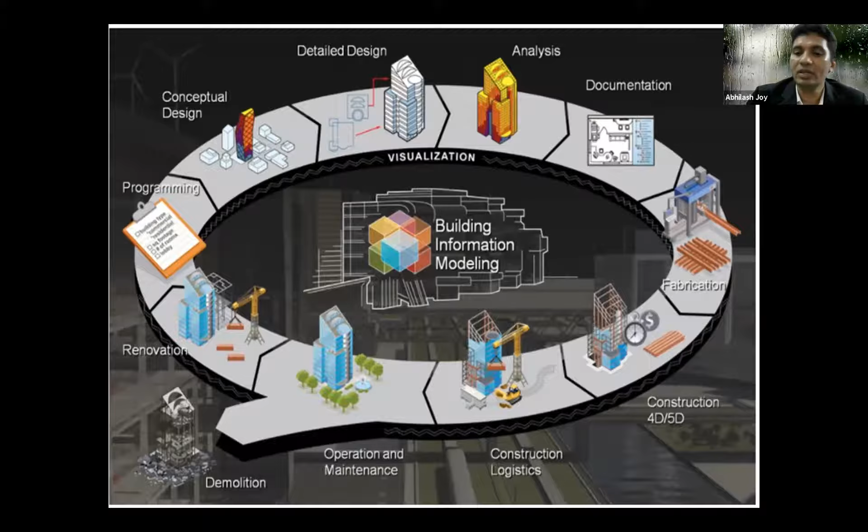This also has a life. Every building has a life. So if you see this, every building has a 7-dimension. You know about the 3D because the length, breadth, and height of the building is there.

4D is the construction time required for construction. 5D is the money part which is involved—cost, budget, cost analysis, etc. And 6th dimension is the sustainability—how it self-sustains, how much energy it requires.

I'll give a beautiful example. If we are in humid tropics, we have a large quantity of rain as well as sun. So if you build a building with glass, it will be very difficult to control the temperature inside. We may have to use a much higher tonnage of AC. So is it a sustainable building? It's not at all a sustainable building.

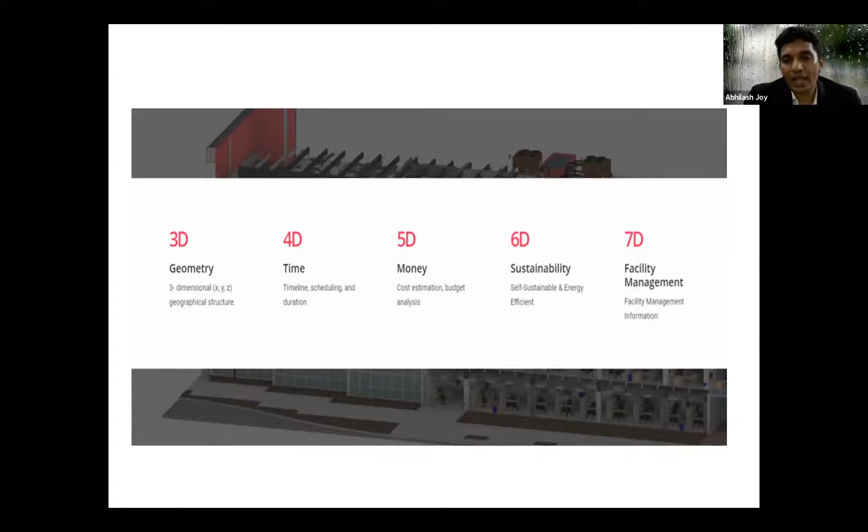Our basic human needs are food, clothing, and shelter, and climate has direct implication on all three. Food—as you all know, we eat rice because we have a lot of rain and it's conducive for growing rice. We use clothes like cotton because it has to breathe, since we are in humid tropics—it will sweat every time. Our forefathers didn't even use shirts because they knew they would always sweat. If you put a coat on in a humid climate like this, it will always sweat and be really hot. And of course our houses should be up to the mark for the climate, because if you construct a house without any shade, water will always come in, since we have rain for at least 6 months. So that's really important.

So the sustainability of the building and the energy efficiency of the building is really important. And 7D is the facility management information, because it has to be run—there has to be a lot of facility management for this system. So a building is not 3D, it's actually 7D.

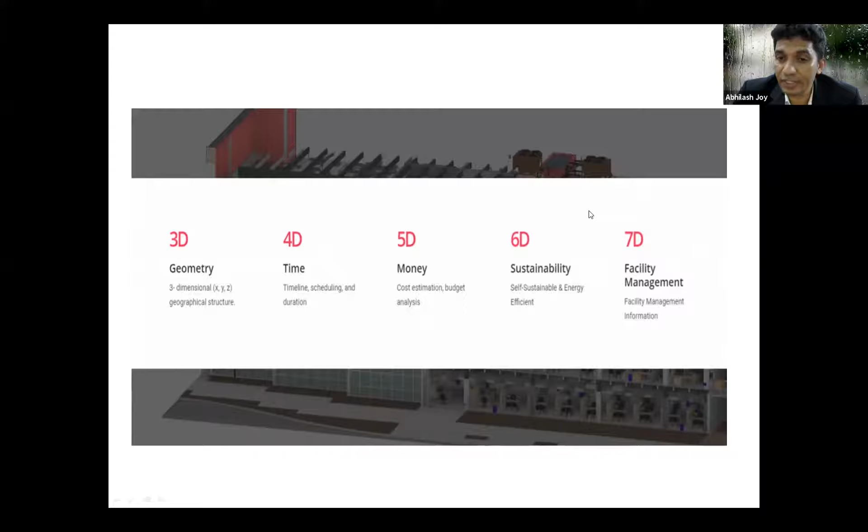So you have to look at the time. There comes the concept of time and money, because if you have 10 crores for a project and you go for a loan, the interest rate will be around 10%. If you finish that building in 1 year, the interest is only 10%, but if it goes for 2 years, it will be much higher for a 10 crore project. So time is really important, along with money, sustainability, and facility management. You have to take all buildings in the 7D concept instead of 3D. That is a really important aspect to be taken care of.

So I'm coming to an example where we have gone in for a steel structure, so that the time and money concept—this 7D concept—is more or less reached.

So there is a life cycle cost analysis for any building. It's from the construction of the building, then the maintenance, the use, the operational, and then the salvage. So it's just like the value and the risk involved.

It's just like buying a car. If you buy a car for 10 lakhs, when you sell it you may get 5 lakhs, but there is a cost involved in between, because you have insurance, petrol cost, tires, maintenance cost, and interest or tax if you're taking a loan. If you operate that car for around 1 lakh kilometers, there will be an additional cost of around 10 lakhs. So the total price of the car is around 20 lakhs, not 10 lakhs. When you buy the car it's 10 lakhs, plus operational cost, and when you sell it you only get back 5 lakhs. That is the example of the life cycle cost.

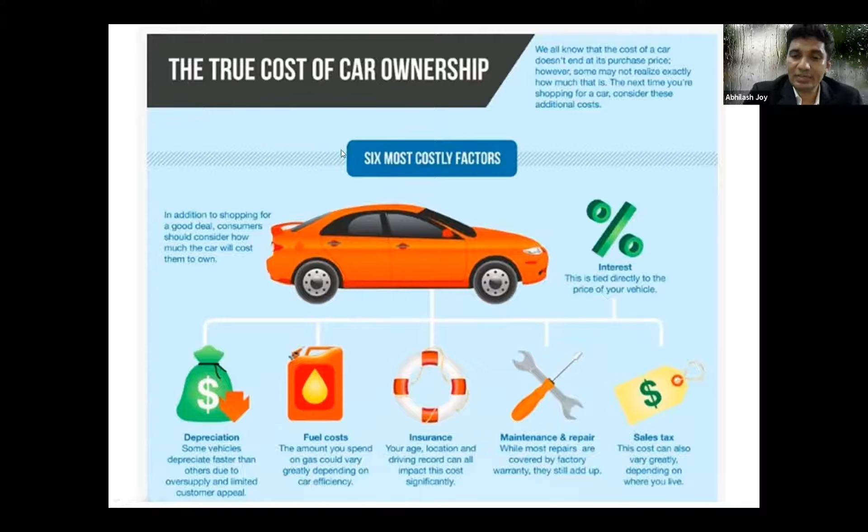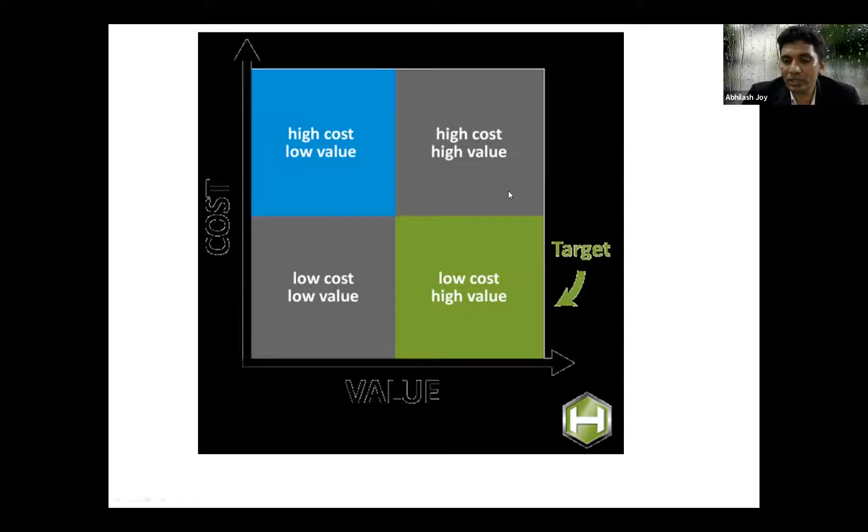If you take that concept, I think that's really important. We always have to build a building with lower cost and high value. We should not build with higher cost and low value, or high cost and high value - we have to build a low cost building with higher value. So our target should be there - the quality should be there, efficiency also should be there, and the cost also should be controlled.

If you take a percentage breakdown, the planning and design may cost maybe 1% or less than 1%, and construction cost will be there. This is a global sort of trend. The maintenance cost is 32%, so it comes to much more than the building itself. The utility costs are around 30-30.8%, and repair will be again 13, 15, 17%. Other administrative and demolition costs will also be there.

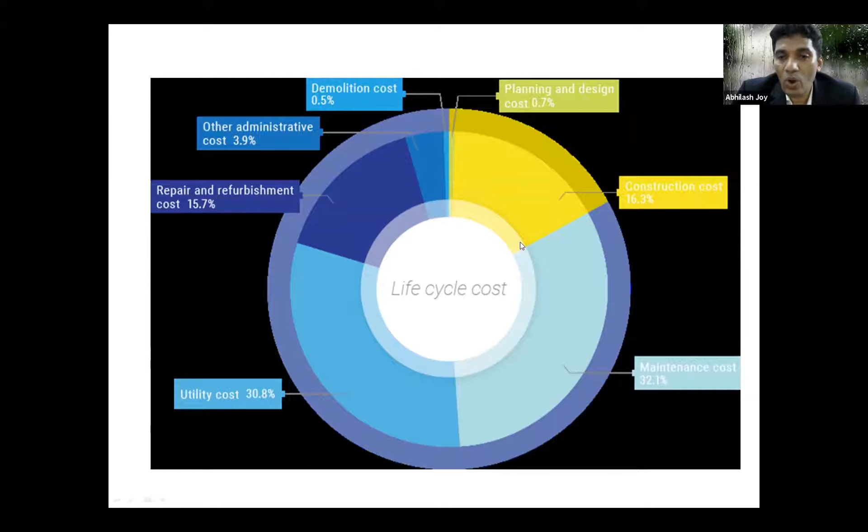So you have to see a building in life cycle terms. Nowadays, even in defense purchases, they are taking the life cycle cost into account - when they bought the Rafale aircraft, they selected Rafale because its life cycle cost was the lowest among all other competitors. So for all systems, I think we have to look at it in life cycle cost terms, and all projects should consider the life cycle cost.

This is a building which is in Cochin - a steel building. I have taken this example to show an alternative technology, as well as the concept of value engineering. This building was initially on leased land and was planned as an RCC building in the first place. This is the plan of the building. As you all know, Cochin mostly has alluvium soil.

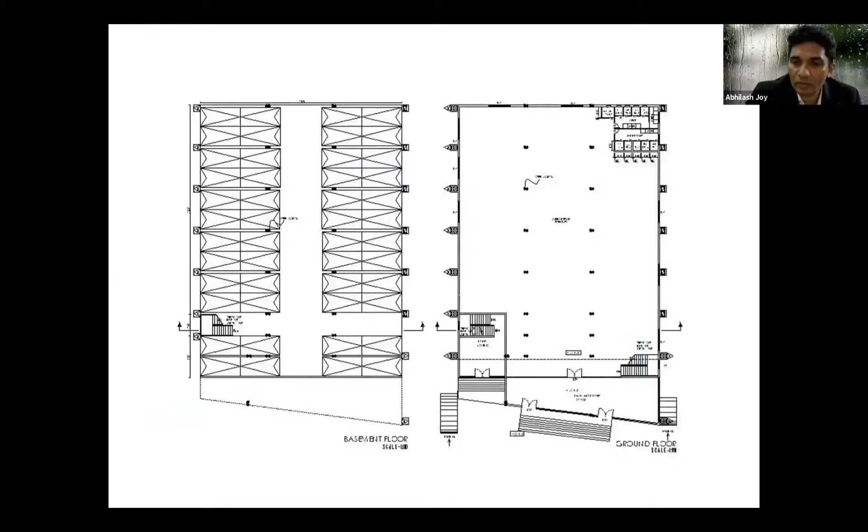Fortunately this area had 2 to 3 meters of sand layer at the top, and then it was clay. This is the elevation of the building - you can see the steel. We have used steel frames, and the roof itself acts as the wall. You can see the frame and the elevation - the roof itself comes down as the wall. We have used a steel frame structure with decking planks, not RCC.

The interesting thing is that the cost was not viable when we went in for RCC, because the piling would have cost in crores, since the top soil layer was not good at all. So they were about to shelve this concept and project, but then we chipped in and went for a steel structure. The weight of the structure came down drastically, and instead of piles we went in for a raft, a strip raft, and the cost of piling came down by around 40 to 50 lakhs in the foundation itself.

The construction of this building was completed in around 6 months. Instead, if it was an RCC building, it would have taken at least 1.5 to 2 years. So you got 1.5 years of added rents, as well as interest rates were avoided. And of course, when you demolish this building, since it's steel, you get maximum value back, because the steel price keeps going up. So you will cover the inflation also.

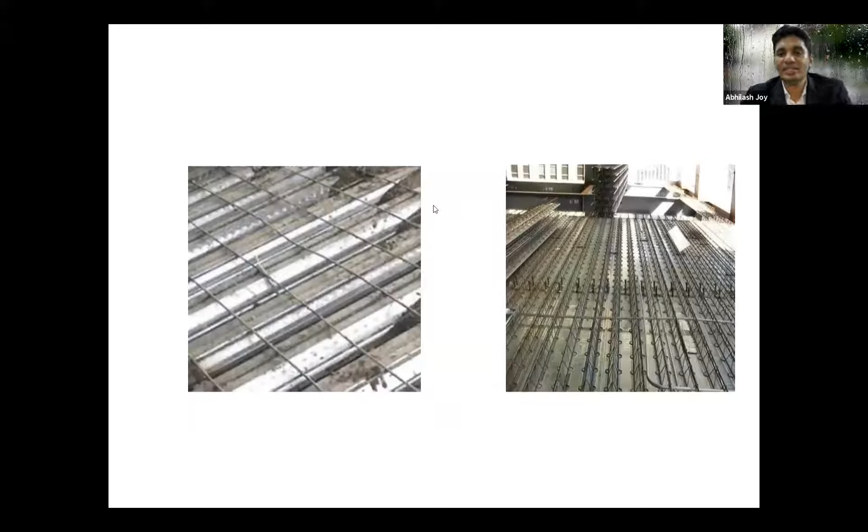You use the decking sheet like this for the structure. You can see it contained the top layer of 2.7 meters, and we had a good sand layer, so this building rests on the top sand layer. Otherwise, if it was an RCC building, we should have gone in for a pile foundation. For around 30,000 square feet of building, we saved around 1.5 crores of cost in foundation. And if you take the life cycle cost, that's the advantage we got.

Again, the screed on the surface of the decking, you can see the decking, was polished and reused. So there was no flooring required, concrete polishing was used instead. So many technologies were built into this.

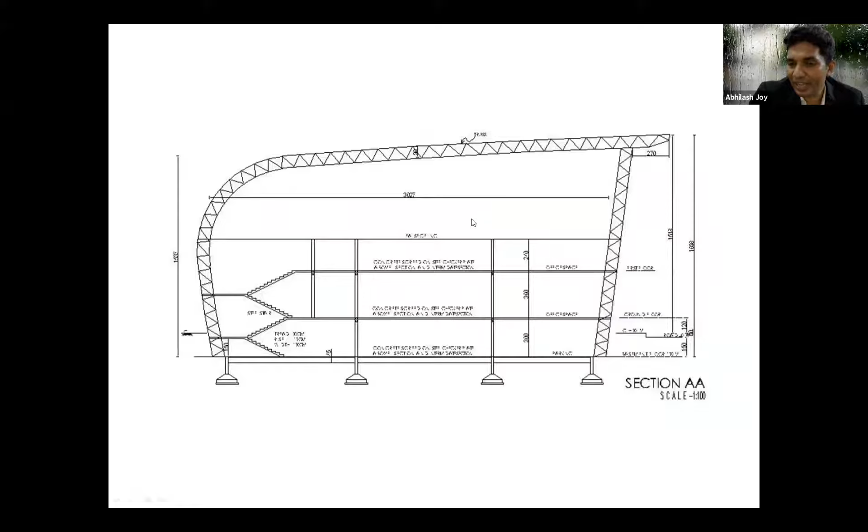So we used steel and reduced the time of construction by around 1.5 years. We again used the roof - if you can see this roof coming down as the wall itself, if you see the sections, the wall and the roof itself was coming down as the wall. So the side walls were again roofing sheets. The weight of the structure was reduced, the time and cost was reduced, the foundation was reduced, and again for flooring we went in for concrete polishing, so the cost was reduced again.

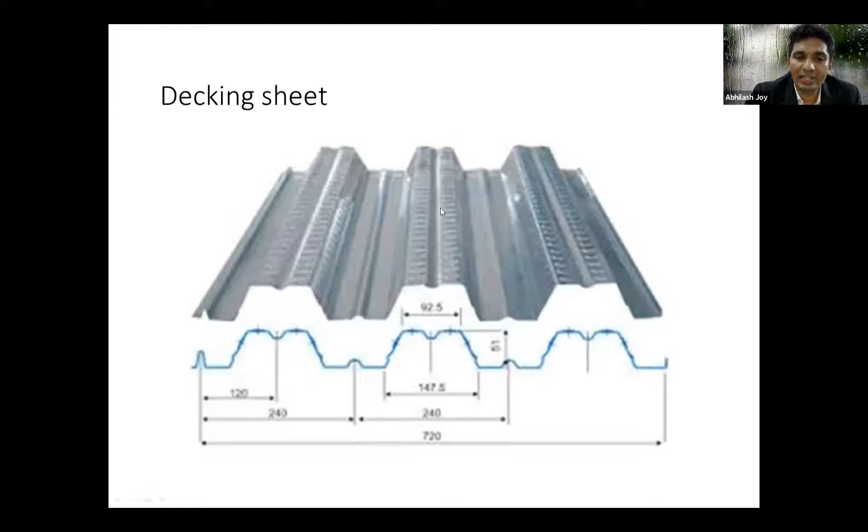So if you look at any building, the life cycle cost is really important, and you have to take care of all buildings in terms of life cycle cost.

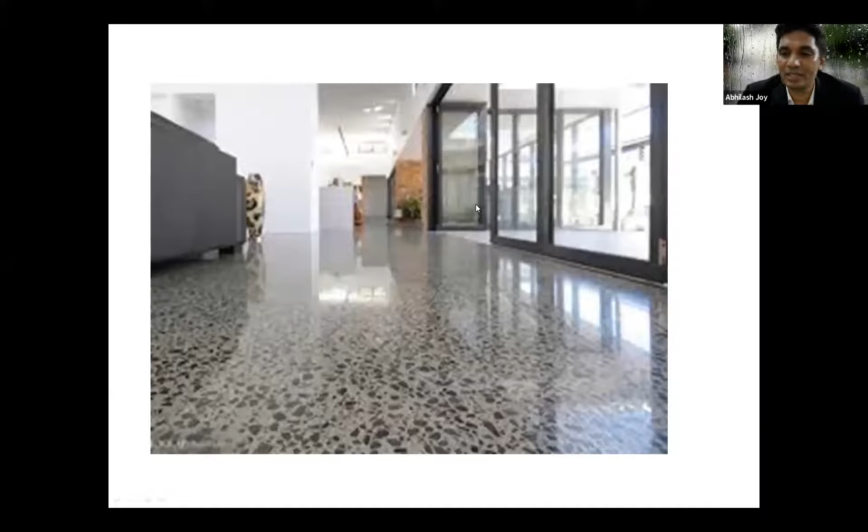So I think I've covered a lot of different materials and technologies, and that's it from me. I think if anybody has any doubts, we can ask. There is some background sound coming from the election campaigns here.